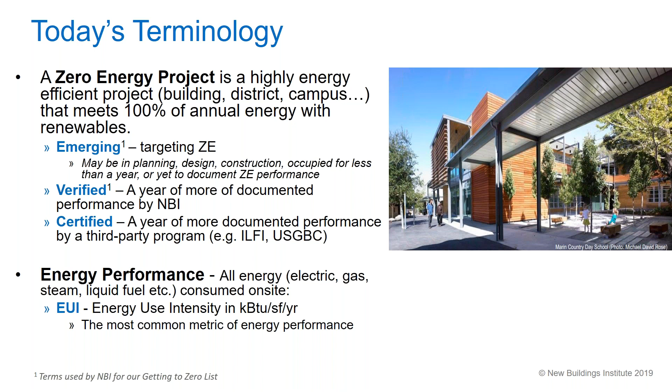We're also going to talk about energy performance. So we're going to use the phrase EUI, that's energy use intensity, site kBTU per square foot per year. That's a pretty typical metric. And the reason we focus on that is because efficiency, load reduction and efficiency are fundamental to getting to zero.

So we've been tracking these things for some time. We started back in 2012 with a status report on zero energy buildings. At that time, there were 60 buildings. We've put another report out every couple years. 2014, we had 160. 2016, we were up to 330. 2018, almost 500. 2019, 580. Now we are just shy of 700 buildings or projects on our list, which is exciting.

What you see there is the 2020 Getting to Zero Buildings list. That's actually a document that we're going to be releasing on Monday. And you can see this growth chart. It's really exciting to see the fast growth in zero energy buildings ramping up. My hope is that we work ourselves out of a job and it becomes impossible to track the number of zero energy buildings that are out there. So I'd love to see this number keep on climbing.

That's our national list. We also put out regionally specific watch lists, several for California over the years, Northwest. We've done sector-specific ones, like the Zero Energy Schools watch list, and a New York status report with lots of good stuff in there. If you're in New York, I highly recommend checking that one out.

And of course, last year's list. We're also just about to come out pretty soon here with a Midwest zero energy project list, which is exciting to be able to announce. So hopefully you'll see that soon.

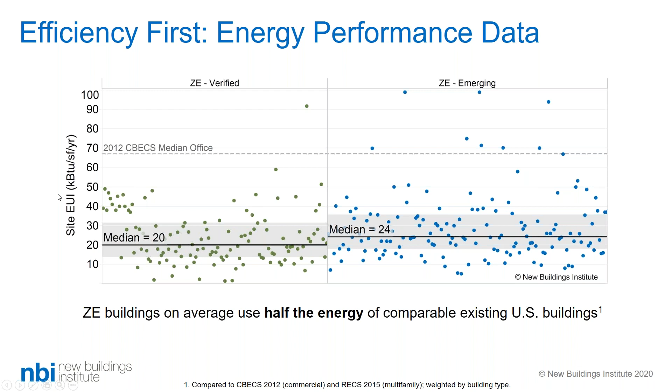And Alexi is going to tell us about the building sizes and trends there. When we first saw zero energy buildings come in, maybe 10 years or more ago, it was mostly small demonstration projects, maybe at colleges or nonprofit offices, things along those lines mostly. And they were pretty little, right — 5, 10, 20,000 square foot buildings. So for a while there, the first projects that got verified were quite small. It's encouraging that we are now seeing larger projects not only get built and be emerging, but come into that verified and certified category. So now we're seeing more big buildings, in the 100,000s of square feet range, actually make it into the verified range. That's a sign of exciting progress.

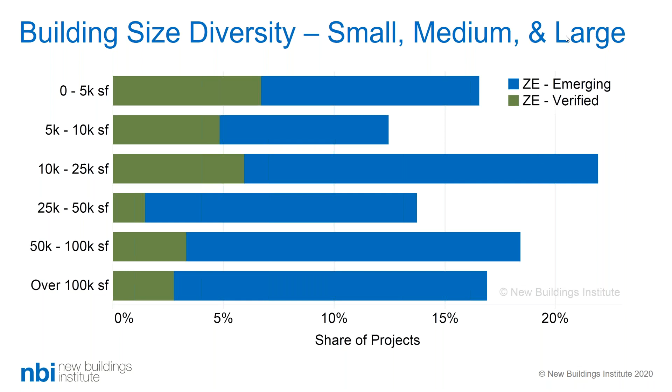So some growth that we've seen recently over the past several years is in the multifamily space. We don't have too many verified projects there yet because a lot of these projects are relatively new, but that's probably the largest growth that we've seen in the building type space.

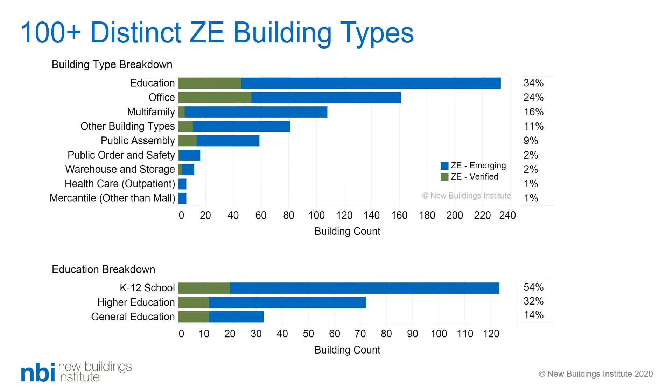Zero energy buildings from the get-go have been pretty evenly split generally between public and private. Who's in the lead can change a tiny bit here and there, but we've seen not only growth in the public sector, driven in large part by policy. Say the state of California has said all our new buildings are going to be zero energy, and we're going to retrofit our existing buildings to get there too. So that drives a lot of progress. When a big jurisdiction like that says we're doing this zero energy thing, cities and states around the country have made these kind of commitments, and Catherine's going to be talking a bit about that in a bit. But it's encouraging to note that we've also seen progress in the private sector.

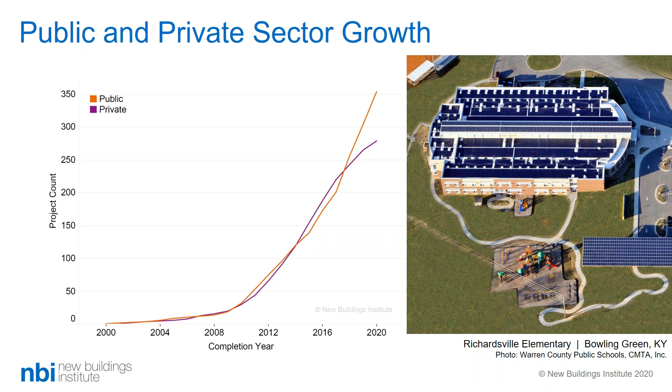So just to summarize the trends we've seen: zero energy buildings are found all across North America, both in the diversity of states—we have 46 states plus DC and 5 provinces—and in the diversity of climate zones. So we have all the way from San Diego to Quebec and all the way from Miami to Alaska.

We've seen exciting growth in scale, with some buildings and owners taking their zero energy approach not only at the building level, but moving it up to whole zero energy districts, or saying we're going to get our whole portfolio or campus up to zero. That's making some interesting changes too in how renewables come into the picture. Used to be they were all PV on the roof only, or maybe on some parking garages. But now when you're talking about getting an entire university campus or state buildings across the state of California to zero, now you're seeing some interesting combinations of maybe on-site and off-site renewables, or centralized renewables, or kind of new structures there.

And beyond just the physical scope of zero energy buildings, we're actually seeing a trend to increase the scope of the emissions and going beyond energy. So now we've got zero carbon certifications coming up, which Alexi will talk about in a bit. And we also see expanding to include things like maybe transportation, embodied carbon, refrigerants. So we're really seeing pushing the envelope beyond just zero energy operationally at the site.

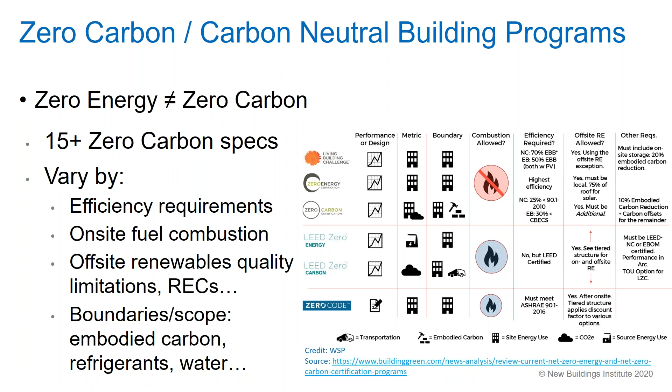NBI is working with several other leaders in the built environment through a group called Collective Impact, and we're trying to come to some agreements on this. At least, we want to agree on the basic foundations of this, so that even if we're not all on the same page, we're all reading out of the same book, and that will help achieve some consistency and hopefully advance the zero carbon buildings market in a cohesive way.

And one way to get to these zero energy and zero carbon buildings is through these technologies. Based on our database, we've pulled out some of the common technologies that we see in these buildings as a way to kind of show the market what people, as we will see in our case studies, what our leading designers are doing. I'll just quickly highlight a few of these. You'll have the slides so you can look at these in more detail.

But one big emerging piece is heat pumps for both space and water heating. There's a lot of development right now in heat pump water heaters to expand the scope of those and where they're viable. Ventilation, in some cases, we see a lot of natural ventilation where the climate is good enough to do that, particularly in California, we see that. And we see a lot of dedicated outdoor air systems to decouple the ventilation and the space load in these buildings.

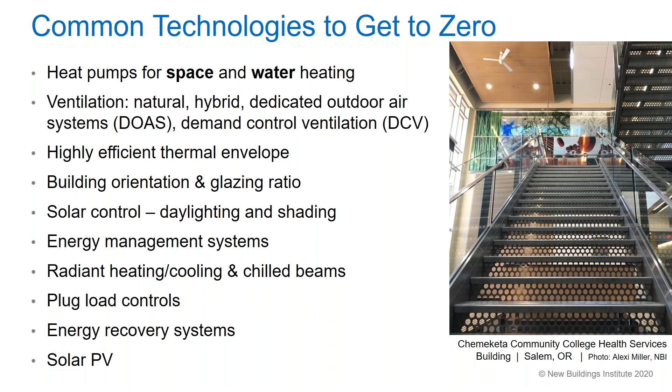Other big ones are radiant heating and cooling. That's very common in these zero energy buildings, but not common throughout the building stock. And then lastly, we have plug load controls, which is also not very common in the building stock, but we see this in almost every zero energy building to have things like automatic shutoffs for different outlets during unoccupied hours, for example.

So there are some interesting emerging technologies coming out that we're starting to see more in zero energy buildings. Heat pump water heaters are a foundational technology to decarbonizing buildings and are being used more and more in zero energy buildings. We're also seeing more buildings, especially multifamily, using central heat pump water heaters. And it's really exciting to see that there's good movement toward deployment of 120 volt heat pump water heaters, which is going to be a really important technology for retrofitting onto existing buildings, so that you don't have to deal with rewiring if you want to put an electric heat pump water heater where a gas water heater used to be.

We're also seeing some movements in equipment and in products toward lower global warming potential, that's GWP refrigerants. Current refrigerants, if they leak out, they tend to be pretty hard on the climate, they're potent greenhouse gases. But we're seeing some interesting new products coming out with lower GWP options and even natural refrigerants like CO2 or propane that are very, very low GWP. In California, in 2023, many HVAC products are going to be required to shift to lower GWP options, GWP less than 750, which you might call mid global warming potential. So that's coming up in California 2023, in Washington 2024. It's coming elsewhere in other timeframes. So that's an interesting shift we're seeing.

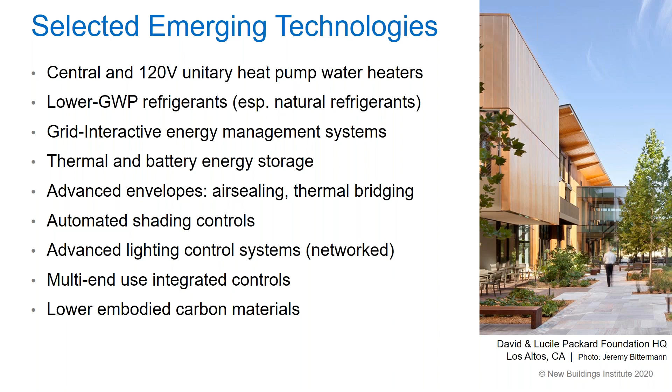So I just wanted to take a quick moment to do a technology spotlight. Heat pump water heaters are a critical technology that are being used in more and more zero energy buildings and in more non-zero energy buildings all over the country. They've been around for decades, well-proven technology, but they're really starting to take off now. The efficiencies tend to be maybe 2 to 4 times more efficient than a conventional either electric resistance or gas fired water heater. And that in turn delivers pretty substantial energy and lifetime cost savings over the course of the lifetime of the water heater, which comes of course with really significant reductions in terms of emissions on site if you're talking about gas, and power plant if you're talking about electric resistance heaters.

We've been running the Advanced Water Heating Initiative for a bit now, and it's really bearing fruit. Some of the work that's coming out of that, for example, the 120 volt heat pump water heater - we're really trying to accelerate the deployment of these technologies: central water heaters, 120 volt unitary, a couple different technology options to try to get as many of these out there as we can. There are lower GWP refrigerant options coming out right now, but that is not to say that we shouldn't be putting today's heat pump water heaters in buildings right now.

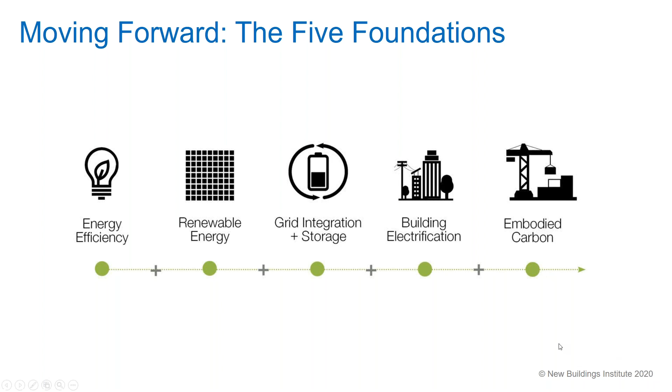We maintain a database that tracks all the zero energy buildings across North America. It's called the Getting to Zero Buildings Database. And Kevin's going to give you a little rundown on that tool.

Just to quickly bring this to everyone's attention, on our website you can see a live interactive buildings database. A lot of the data we showed is available online. Here's the link at the top of the slides, or you can search for it. Some things you can do with the database are filter by region. For example, here we filtered just to New York, so you can see what's in your neighborhood and what the leading projects are in your climate zone and region.

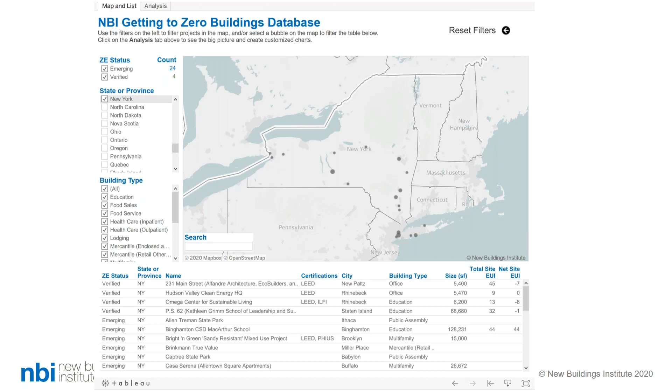Aside from the map, we also have a bit of analysis available with the same filtering capability using those checkboxes on the left side. A lot of what you see here should be familiar from what we've presented, so you can go in and tinker with it and see how things break down in your area as well.

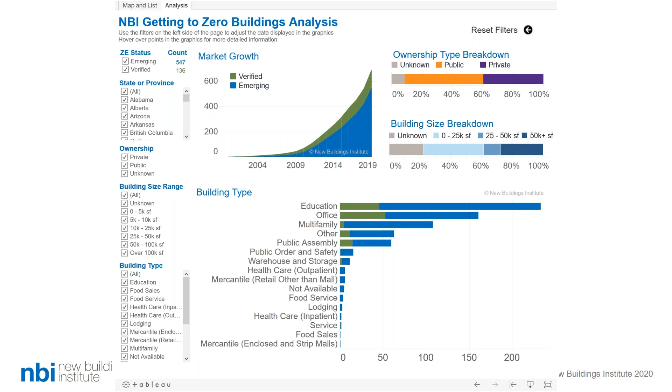So we encourage everyone to use this. We see these graphics and slides pretty often, so we just ask that you properly credit New Buildings Institute. Here's a citation to get you started.

Now that you've put a building out there, let's be sure we are tracking it. There's a project registry that we've put together. So if you poke around in the Getting to Zero database and you don't see your project in there, let's put it in there and give you the credit you deserve.

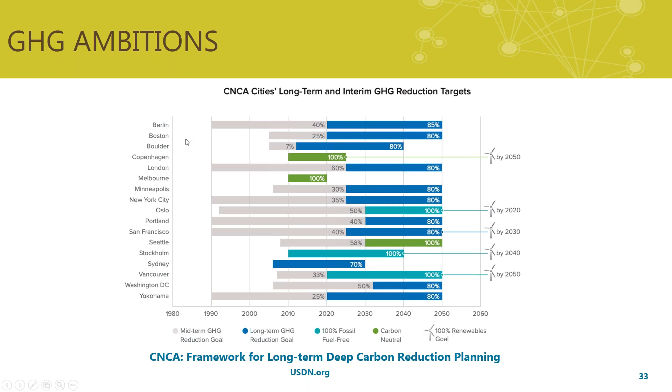What happens when local governments unpack their goals and try to understand how they can reach these targets is that buildings are a big part of that. When they examine what they have direct jurisdictional authority over, often energy efficiency and building development through zoning and codes are areas where cities and counties have more direct authority, as opposed to shared authority with the state or regional government. That's not to say this isn't hard work, and many cities are working in partnership with utilities who run energy efficiency programs as well.

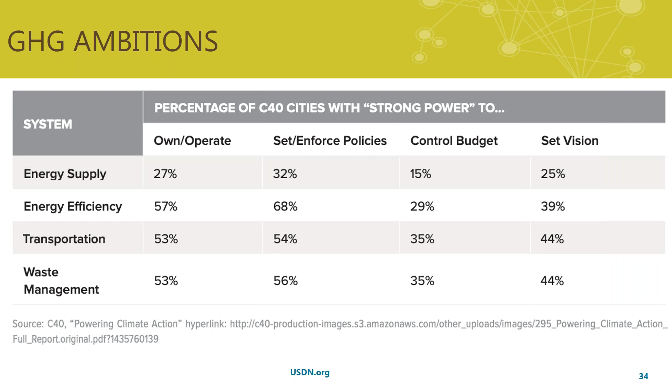It just does illustrate that there is sometimes a more straightforward path for cities to work on decarbonization in the built environment, and why the topic is of interest to cities and counties, and why it's always been a focus of our network. So given this, what's changed and what's emerging given this context?

As I mentioned, building energy was one of the first areas USDN has focused on since we started as a network. We've been helping local governments think about building policies for a long time. This began with early benchmarking and disclosure policies. While there are a lot of cities that have benchmarking policies now, there are still many more communities out there who are interested in standing up their own benchmarking policies. So that's still an active area of exploration.

As cities began examining their benchmarking data, those that had access to it realized that the emissions reductions and market transformation of the built environment they were seeing through benchmarking alone was just not going to cut it to reach some of those goals I showed before. So increasingly, a lot of cities and counties are looking to policies that go beyond transparency and disclosure, towards advancing specific actions and emission reductions in existing buildings and new construction.

I'll spend most of the remainder of my time talking about what we're starting to see. Many of the examples are drawn from our Zero Cities project, which we actually worked on with New Buildings Institute. This was a collaboration of 11 cities and community organizations working on transforming the built environment through decarbonization while also lifting up social equity. This project concludes this year, but many of the policy and programmatic efforts that emerged through this group of cities are also representative of some of the trends we're seeing more broadly.

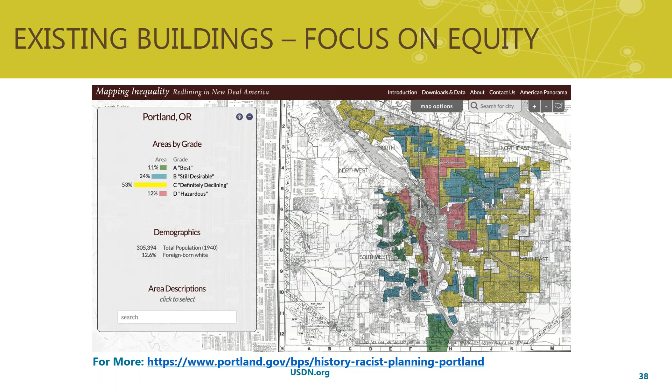Portland and their community partner, Verde, went through a series of dialogues, and the community lifted up that they were very concerned about energy burden and gentrification. The result of those dialogues was pushing for rental energy efficiency standards as a policy method of improving the city's worst buildings first. This was a shift in how they were thinking about their building policy, which had previously been focused around new construction and large commercial buildings. The community redirected some of those near-term efforts.

So many of our members in USDN are also trying to think about how to address energy burden and make health improvements in partnership with community. We're likely to see this trend continue, especially in light of the pandemic. So it is something that I wanted to lift up first.

Another piece of the existing buildings is really talking about ensuring performance. As I alluded to earlier, cities are really trying to push beyond benchmarking and transparency towards action, so they have more certainty that they will reach their emissions goal. So one method of doing this is a growing interest in building performance standards and other beyond-benchmarking policies.

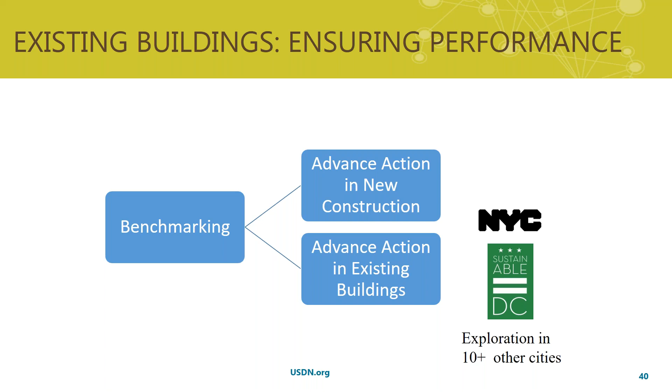There are more local governments than the three I named that are exploring performance standards. Besides the policies themselves, they're also thinking about what support mechanisms are necessary for these policies to succeed, like incentives, financing, and different types of support for private developers. They're also trying to think about how energy can be advanced alongside health and resilience through these standards.

Many cities were actively engaged in the 2021 IECC process to help ensure the code contained efficiency gains aligned with their goals. Since many national code changes end up as the basis for local stretch codes and local government adoption, it's becoming increasingly important to ensure the code contains strong efficiency gains in order for cities to be successful with their climate goals.

If you were following the codes process very closely like I was, and maybe you're just a nerd like I am, there was an electrification-ready provision in the proposed code. That's broadly in alignment with what we're seeing, which is broad interest across the country in learning more about electrification as a decarbonization strategy.

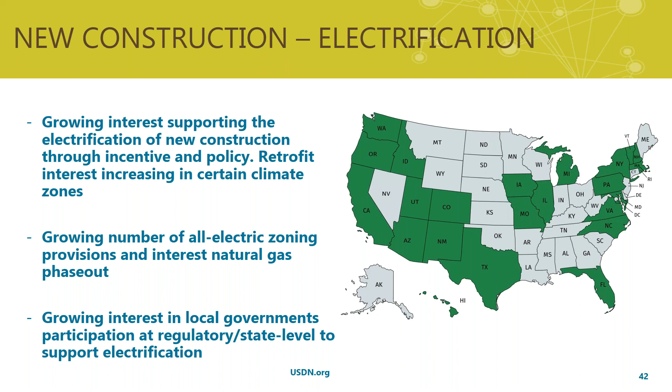We're aware of at least 11 state legislatures actively discussing this concept. So many communities are starting to look towards state regulatory agencies, as well as state level work, as where they might want to continue to engage in the future on electrification.

Hopefully this provides a helpful snapshot of how we are seeing some emerging policies at the local government level. There are obvious emerging complexities we're just beginning to understand and plan for. These include: how is the real estate market going to change in light of COVID and everyone working from home? How do we best integrate health and resilience into how we think about retrofits? And how does the ongoing national conversation about social equity fit into climate planning?

If you'd like to learn more about how cities are approaching work in the built environment, you can take a look at our Zero Cities project page. We just released a project reflections document to date, which might be helpful and provide more of a snapshot into how cities are working with community to advance high performance buildings across the country. So thanks, and I will turn it back over to NBI.

Thank you, Catherine, for that. Lots of info in that content. That was really interesting and encouraging. That's a good progress. Do we have questions popping in through the chat, or shall we proceed to the next set?

Well, we don't have any specific questions on Catherine's section, but Kevin really piqued the interest of our audience, and everybody wants to know who is the per capita leader on zero energy buildings. Kevin? Actually Vermont, and then Oregon is next. I think California comes in third or fourth. But yeah, Vermont is the winner there.

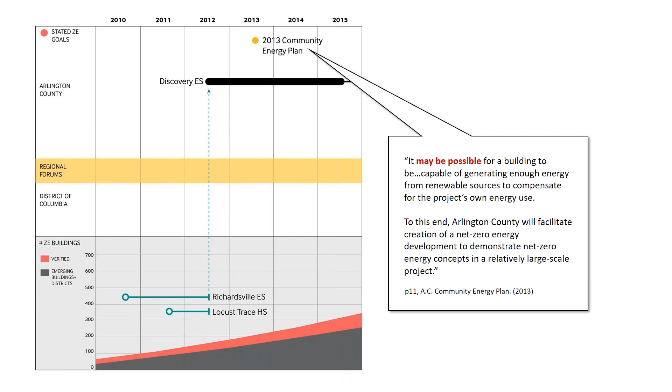As that project was ongoing, Arlington released its 2013 Community Energy Plan. It had this great little blurb in it, like, it may be possible to generate more energy from renewable sources than a building might use. So there was this tentative concept of it out there, but it was thought of as a demonstration, expensive thing to do.

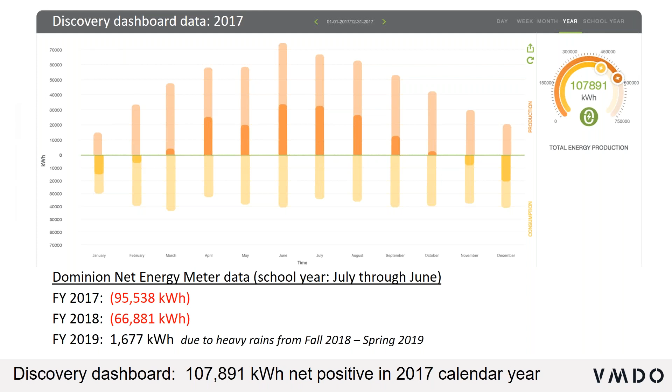Discovery opened in 2015 and used a lot of the technologies that were mentioned before: geothermal, HVAC, right sizing equipment, demand control ventilation, all state-of-the-shelf stuff that was integrated in a way that produced zero energy. Zero energy was a driving force in the design, so we had good data on it. It was verified zero energy pretty quickly afterward.

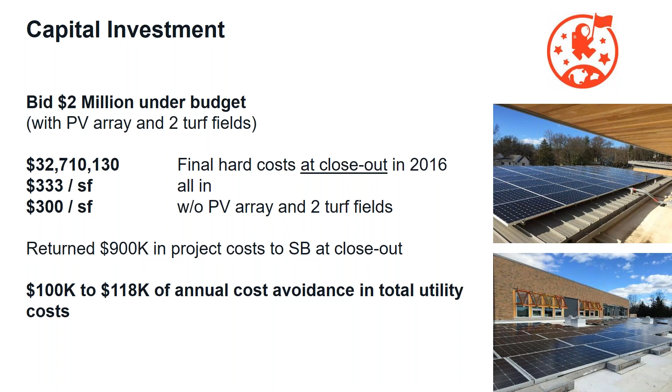For the capital investment, we came in $2 million under budget, even with the PV array. And the annual cost of ownership of Discovery is less than a tenth of other schools for Arlington. So it was a pretty successful model.

That success allowed us to, even before the project was open, secure Fleet Elementary School. That opened in 2019. This time the PV array was a PPA. It's on a tight, complicated site. It's 4 stories and uses a lot of the same technologies that Discovery did.

We took some lessons learned from Discovery and pulled them into Fleet. We changed the exterior envelope construction because Discovery was ICF construction, and that was a little bit challenging in this market, so this moved over to spray foam.

Shortly after we got through DDs in Fleet, our athletics and community design studio won the Lubber Run Community Center in Arlington. This was an important milestone for the firm, in that even though it was within the same municipality, they were different client groups, and the Lubber Run Parks and Rec was interested in exploring net zero, but it wasn't a requirement for the project, and they were a little bit nervous.

So we spent a lot of time educating the client, taking them to Discovery and touring it, having them talk with colleagues over in public schools to help get that sense of this is something achievable, and it was important, and it was verified, and it was easy to operate, and could come in at a normal budget and not to worry, so that by the time the team and the owner made the go, no go decision on net zero, everybody had already bought in.

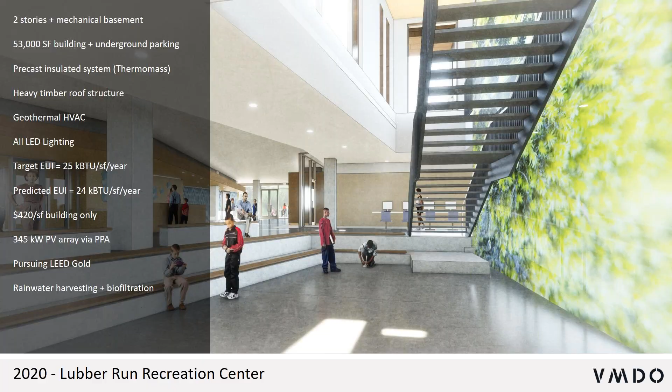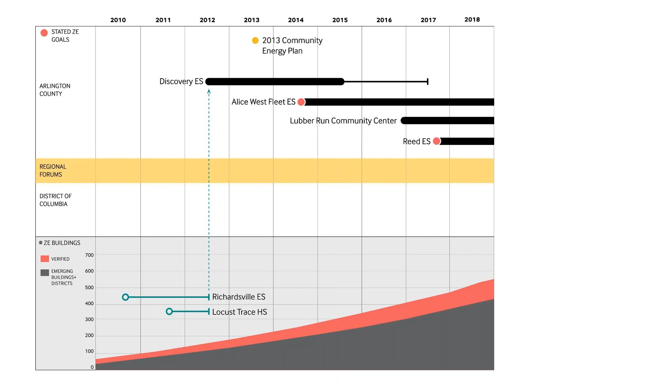From there, we won shortly after, as Lubber was exploring net zero and that client education was happening, Reed Elementary School, another net zero school for Arlington Public Schools. It is a renovation addition, 4 stories again, weird tight site again, opening in 2021, again using a lot of the same technologies and approaches.

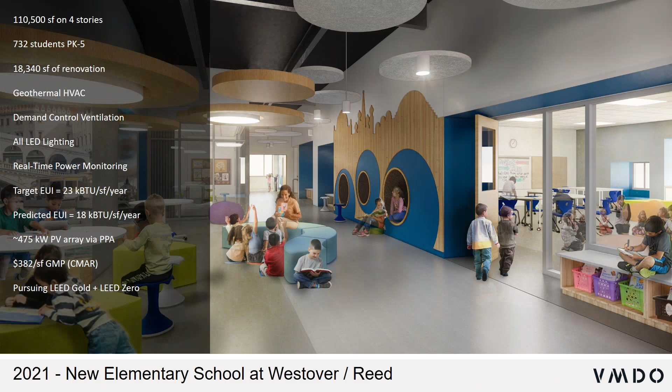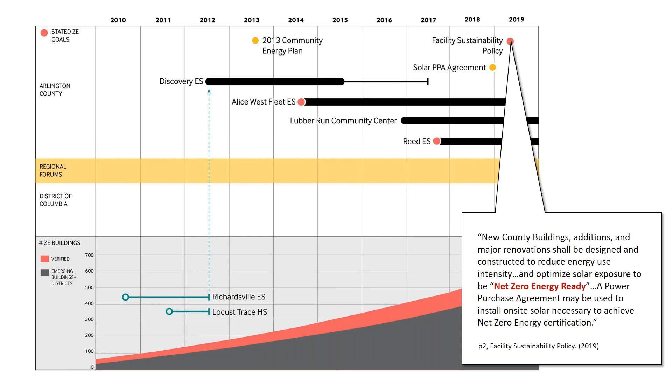So these are 4 projects that are going on. As we look at the larger context, Arlington Public Schools did a solar PPA agreement for 5 of its schools at the end of 2018. And in 2019, they released a facility sustainability policy, which states that all county buildings should be net zero energy ready. So they went from, in 2013, it might be possible, to requiring all public buildings to be zero energy ready within 6 years.

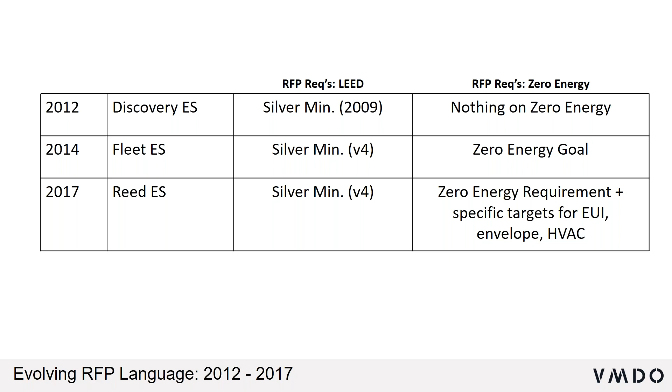If we look at the evolution of the RFP language, from 2012, Discovery's LEED silver minimum under LEED 2009, and nothing on zero energy, to 2017, silver minimum under V4 plus a zero energy requirement and all these specific targets for EUI, envelope, and HVAC. So that's a 5-year span for such a revolution.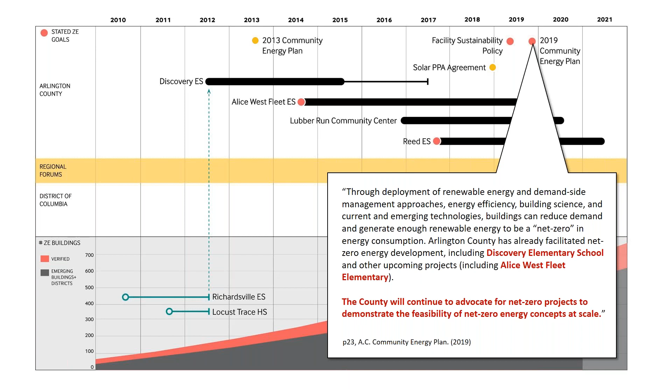Then in the 2019 Community Energy Plan, which updated the 2013 plan, it now cites Discovery and Fleet as evidence of net zero energy development and commits the county to demonstrating net zero concepts at scale. So it's quite a sea change in 6 years.

But what's most interesting to us is how this has become a regional dialogue. In 2016, the DOE Zero Energy Schools Accelerator launched at Discovery for everybody to share best practices around getting to zero energy in schools. And in 2019, the DMV Net Zero Building Coalition launched, again a Maryland, DC, Northern Virginia discussion around how to move more quickly and share best practices.

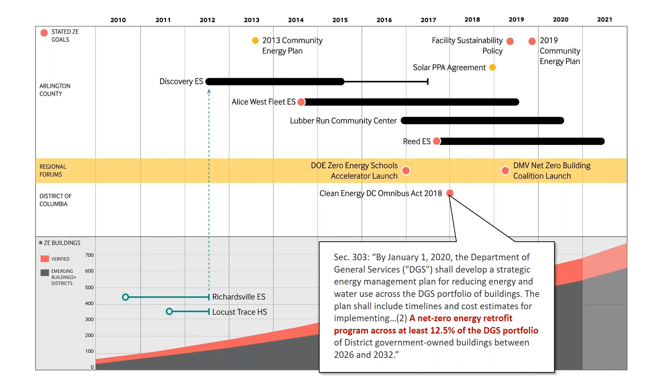The Omnibus Act has a requirement for a net zero energy retrofit program across 12.5% of the DGS portfolio. Clean Energy DC has district targets, but also in their action areas, 10% is constructing new net zero buildings. So you can see this net zero ethos permeating DC, and a lot of that points back to the successes within the area, including Arlington and its evolution over those 5 years.

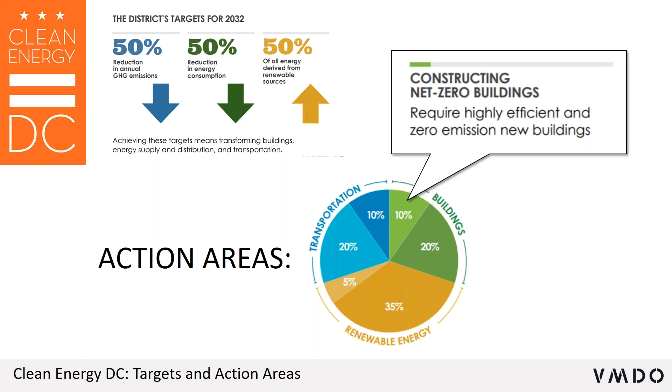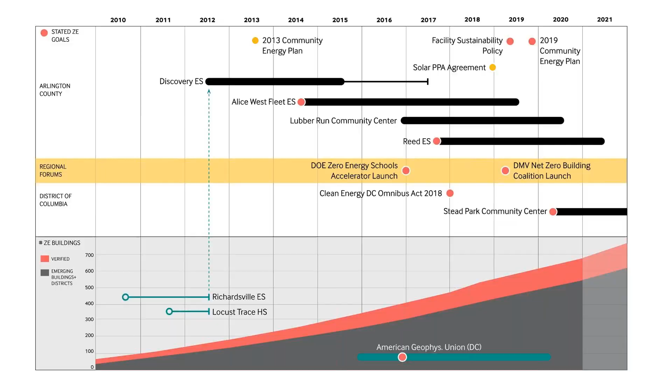So from what we witnessed in the market, the keys to transforming markets: the first would be developing a long-term relationship with key decision makers. That first leap of faith with Discovery Elementary happened because we had a very good relationship with our client at Arlington Public Schools. You have to have somebody willing to trust you to try new things.

The second is to demonstrate that zero energy ready can be done within current construction budgets. It doesn't have to be an add-on anymore. It can be accomplished with today's technology and today's budgets.

Third is leveraging successful projects and happy clients. If we hadn't been able to direct our Arlington clients to the successful projects in Kentucky, it wouldn't have happened. In addition, Lubber Run probably wouldn't have been as smooth a decision to go net zero if they hadn't been able to talk to colleagues over in public schools.

And then, educate. Every meeting, you're educating and reminding everybody that zero energy is the target. I talked to the project manager on Discovery, and he said he'd given 20 to 30 tours and talks and spoken to hundreds of people about the project. So it requires education all the time.

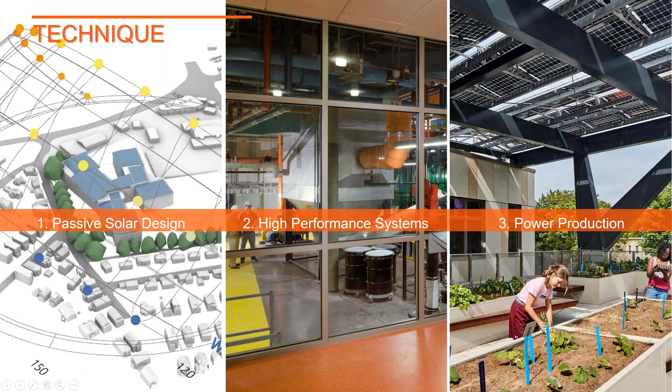In terms of the technique, there really are 3 clear steps. It's quite straightforward on the building scale. We have to start with passive strategies, lowering the need for mechanical systems. Next, we supplement with high performance, low carbon systems. And then, and only then, provide renewable energy for the needed heating, cooling, and power. Here we must do what we can on site, but also be part of advocating for a green grid, something we can both draw from and contribute to.

Not least, we have to also address the people and the building use. How people use buildings, what they do and how they do it, is not only the focus of the building design and configuration, but also the primary component of building performance. If nothing else, one positive from the current pandemic has been a focus on health and wellness, especially within buildings. More of this I'll touch on at the end of my presentation.

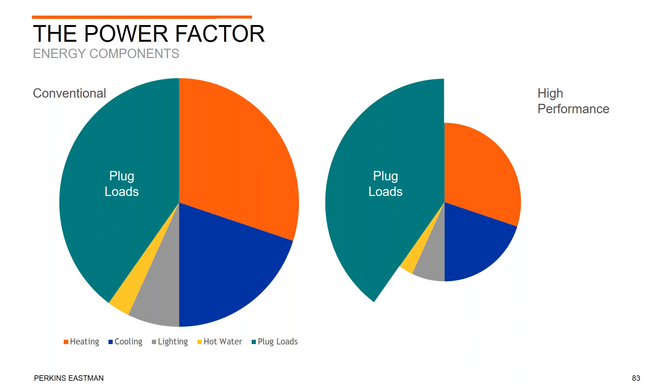The power factor. Prior to the pandemic, we were focusing a lot on plug loads. As we move from conventional energy consumption, depicted on the left, where you see the components of energy use, to high performance consumption depicted on the right, we know that the last component of energy to be improved is plug loads. We're working on ways to address plug loads in our buildings, so that's kind of the new frontier.

And again, the people. We need to focus not only on energy, but visual, thermal, and acoustic comfort, plus air quality. All of these aspects must be considered in making an optimal educational or work environment. And I'll share more on air quality in our case study.

So let's look at that. This is the project which is under design: the Tobin Montessori Vassal Lane project for the City of Cambridge, Mass. Now completing schematic design, it includes 4 school programs, preschool through grade 8, in about 300,000 gross square feet of program space, 400,000 if you count the parking, which is underneath. The project has a mandate for net zero emissions, and we're targeting net zero energy and reduced embodied carbon.

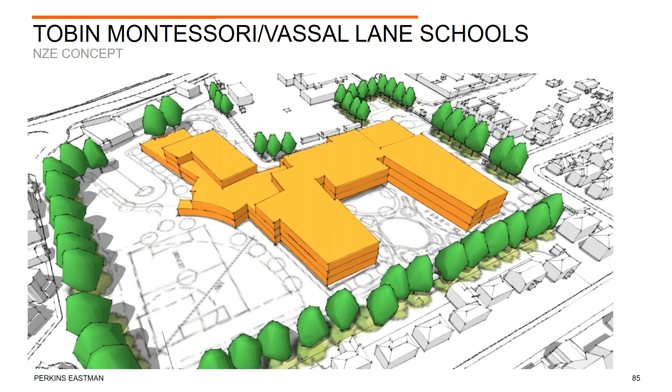This is a look at an initial study for a 2.5 to 3-story building with plenty of roof for power generation. We looked at an energy use intensity target and fixed on about 22 kiloBTUs per square foot per year, which is the lowest for the city and among very respected projects, including ones you've just seen that have targeted net zero energy. We'd love to go lower, but the building will have heavy use during the school day, evenings, weekends, and also over the summer for the preschool and community school and shared community facilities.

Paramount to good design is solar orientation. It's often noted that passive solar design is really important, but in our observation, it rarely is paid enough attention to. So this is a little study of our building, which is doggedly facing the sun, locating on an east-west axis as shown on the right, reaping the benefit of, conservatively, an 8% reduction in energy use just by the siting. The actual number might actually be twice that.

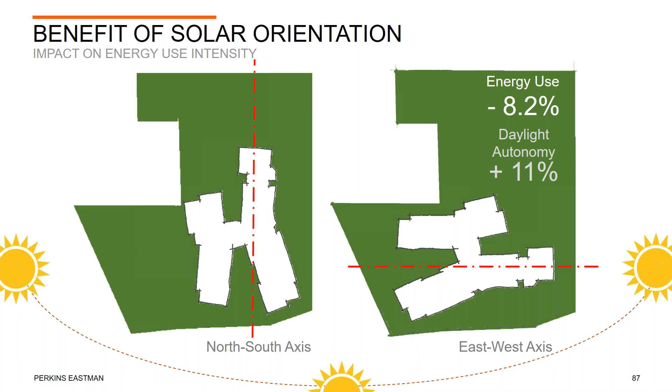Now, a major challenge has been the need to preserve and enhance as much community open space as possible on site. So while the solar orientation is terrific, the building is piled up to a 4-story building. And in our climate, with our solar access, solar panels make about 66 kBTU per square foot per year. With a target of 21 or 22, they can really only support a 3-story building with full coverage. So we're having to design our way around that.

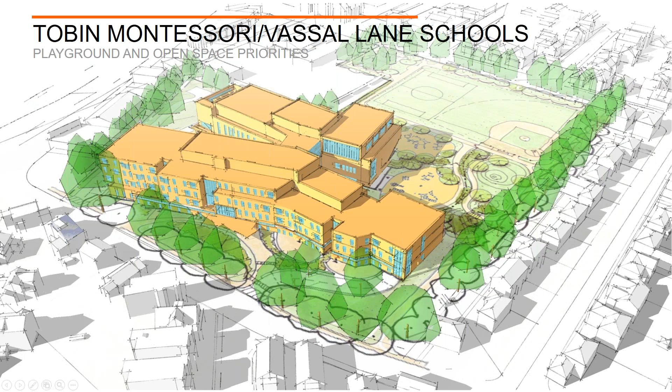One key may be, beyond the solar orientation, looking at connecting the building to the site and microclimate. Our climate in Boston is sort of like DC was 20 years ago - DC has shipped their climate up to us, thank you. And now, when we didn't used to have to, we pretty much need to air condition. But the building can be designed to minimize the amount of AC used. So here you see an image of the heart of the school designed with a permeable building skin that allows us to connect to the outside and reduce air conditioning loads.

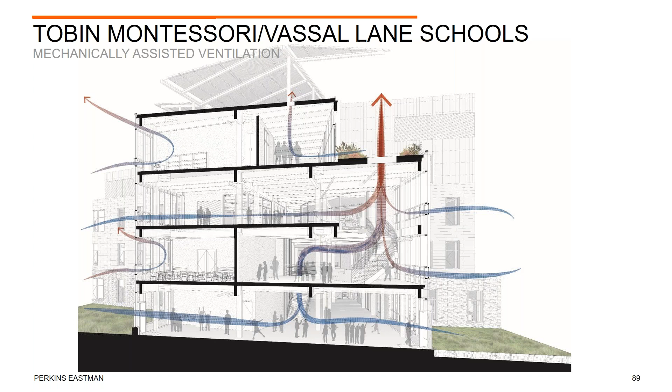The facade design is no longer just about gut feelings. It's about window wall ratios, high performance glazing, solar shading, and doing iterative daylight and energy modeling to optimize the facade, in addition to providing a variety of view windows as reflected here.

And PV, related to power generation, we must pile on the power generation, but also must finesse the details. The PV is developed in an integrated aesthetic and analytic approach.

We're developing a rooftop canopy to limit walkways, which can reduce the available area by 15%. And we're looking at this butterfly pattern that adds about 5% to the overall production compared to a flat array.

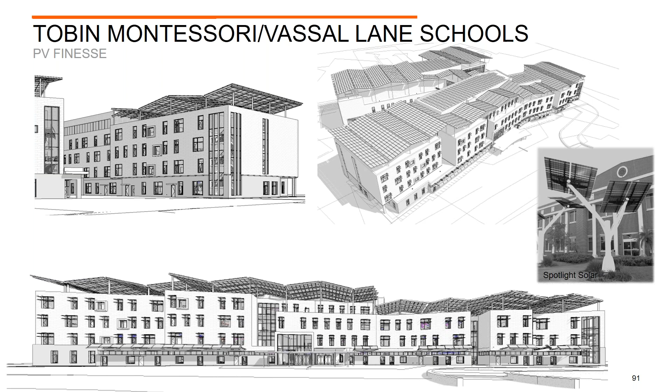One of the more interesting studies we're doing is related to ventilation strategies. The question has been, how much air must we deliver to make as safe and productive an environment as possible? No question, we'll have a dedicated outdoor air system with heat recovery and air filtration.

Pre-pandemic, we were looking at adding ventilation for increased student performance. We're contemplating improving on code by providing 3 air changes per hour, or bettering ASHRAE recommendations by 30%.

Along came the pandemic, and we're looking at more ventilation to safeguard our students. I'll be honest, when we learned that the Harvard School of Public Health Healthy Building Team suggested 4, 5, or even 6 air changes per hour, those of us thinking about energy conservation freaked out, thinking about what the impact might be for the energy regime, and also wondering just how big those ducts might be.

But we looked more carefully at the recommendation. The call for clean air increases the benefit of filtration and recirculation, and we've been evaluating a hybrid air source heat pump and ground source heat pump system that incorporates local MERV 13 filtration, and this can contribute to the clean air regimen. So here you can see that recirculation and filtration can add as much as 5 air changes per hour to the dedicated outdoor air supplied.

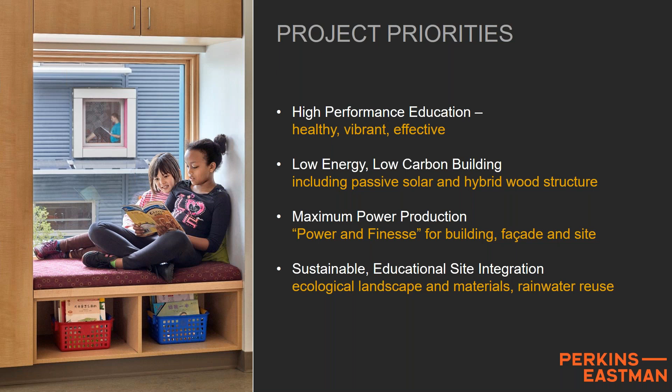So our project priorities range from high performance, low energy, and low carbon to maximizing power and interacting with the grid, and also interacting with landscape materials, reusing rainwater and the like. So a holistic approach in addition to a net zero approach.

So back over to NBI, or on to Darryl. Thank you, Dan. That was interesting. What a difference a pandemic makes, huh? In how much? Well, in everything. Ventilation, not least. Thank you for that perspective there.

I'd like to pass it over to Darryl Boyce to talk about the ASHRAE headquarters.

Thank you. I'm very pleased to be part of this workshop and talk about our real world experience and sort of applying sustainable development principles in the real world.

Our current headquarters, which we are still in, is in Atlanta, Georgia, 35,000 square feet. We actually upgraded that facility and added to it in 2008 to LEED Platinum. We were not in any particular rush to leave the building, but the Children's Healthcare of Atlanta really needed our site for their expanded facilities, so they purchased it, and we went looking for a replacement.

So we thought we could buy some land and build a building, have a building built for us, do a lease purchase, or buy an older building and make it good. We chose the latter, and we bought a 66,000 square foot building that had been built in the 70s, purchased in December of 2018.

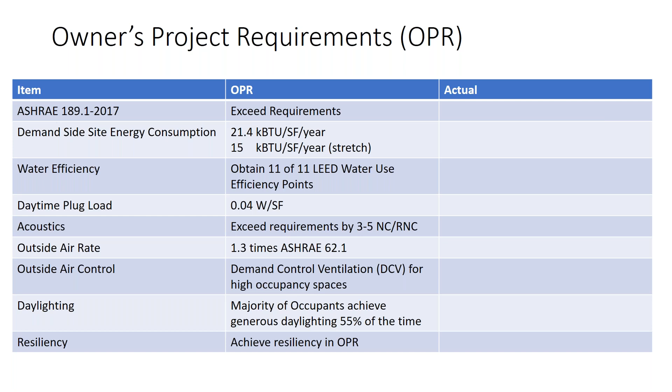Our current building had some issues with acoustics, so we wanted to really push the acoustics envelope by 3 to 5 NC/RNC versus our standard requirements. Ventilation rates 1.3 times ASHRAE 62, demand control, and daylighting for the major occupants 55% of the time.

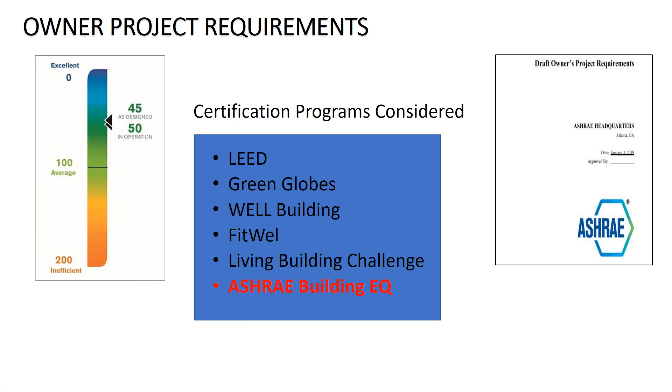We also analyzed some certification programs and felt that any money that could be spent on achieving certification is better spent in the building. We ended up relying on ASHRAE Building EQ as our primary evaluation program, and also LEED Existing Building was the next program once we got up and running. We're also planning to get a few of the petals in the Living Building Challenge.

The standards we must meet or exceed are shown on this slide, but the only thing I really want to talk about is that we wanted to exceed or meet our ASHRAE Advanced Design Guide for zero energy office buildings, because that's where we were headed.

We had a very aggressive schedule. In January of 2019, we hired a design team, and we need to be in by this coming October because we have to be out of the building that we sold to the hospital. So we're keeping on schedule right now, and we are on schedule to be in the building in October.

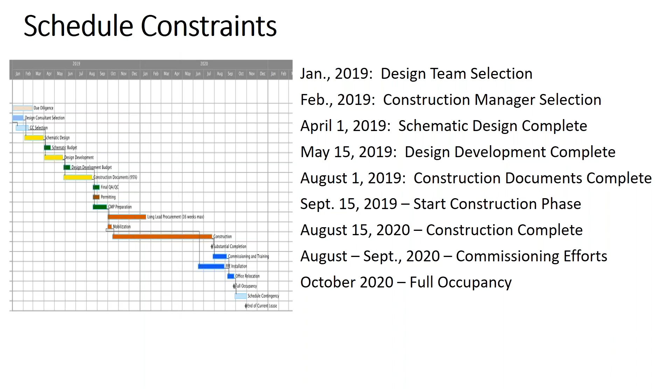Everything's good. Our construction budget is a little over $10 million, or $165 a square foot. We had donations, and photovoltaics are not included in that budget. The total project budget, including purchase of property and fit up, is $20 million. We believe we hired a good design team and got on with it.

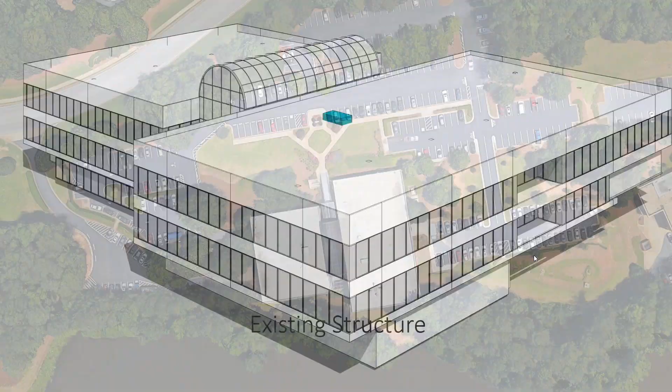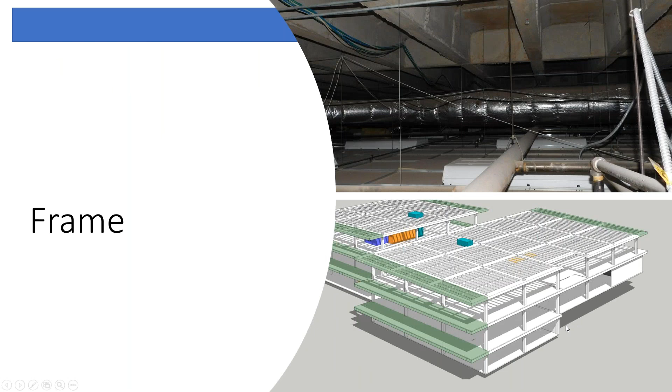So we went from a very small site, like 2 acres, to an 11 acre site. We've actually moved to a much more pleasing location. We have trees, a small lake, and plenty of parking for staff and visitors. The existing structure really was precast concrete panels and floor to ceiling window units, not very efficient. But the structure, when we analyzed the building, was the frame and the structure had good bones. So we felt this was a good move for us. The site was a great location.

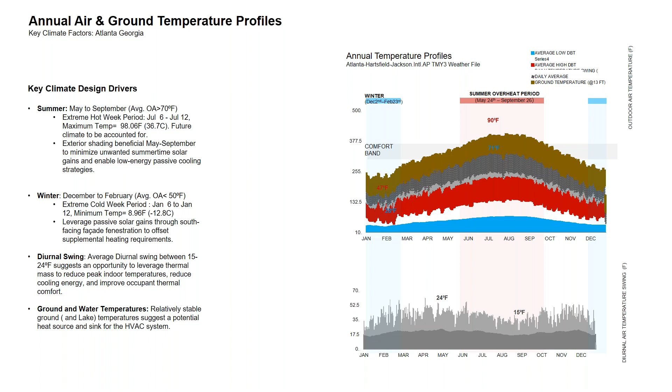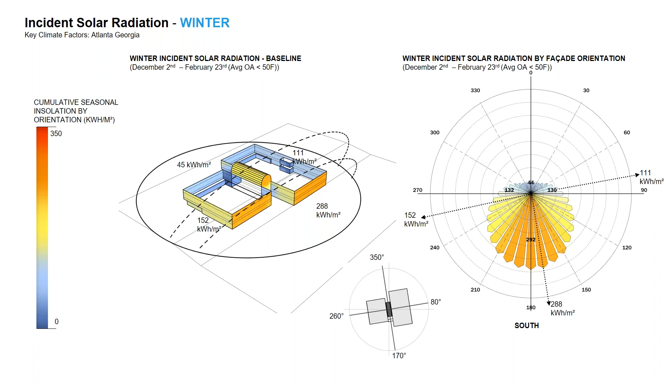We did analyze the climate factors so we could have a better understanding of whether we could use ground source energy and the amount of free cooling. We also analyzed, since the building was already there, the solar impact on the building from a daylighting point of view, photovoltaic potential, and energy use.

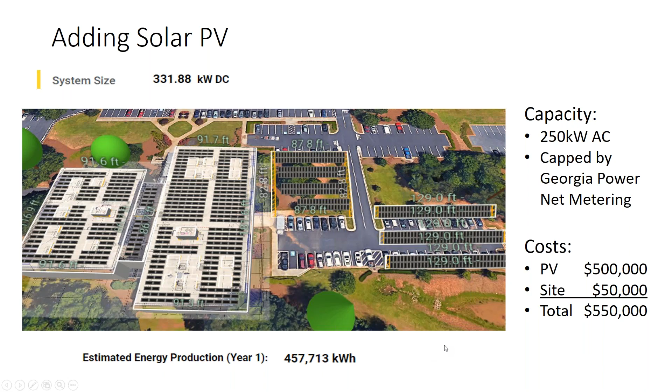We did actually come up with a plan to put a lot of photovoltaics on the site, a certain amount of it on the building, and then some on-grade photovoltaics. We were capped at 250 kilowatts AC, and total cost for that is $550,000. We believe that will meet our energy use requirements.

When we analyzed the temperature around the Atlanta, Georgia area, we found that 23 to 30% of the time we could use natural ventilation for cooling. So we are doing that.

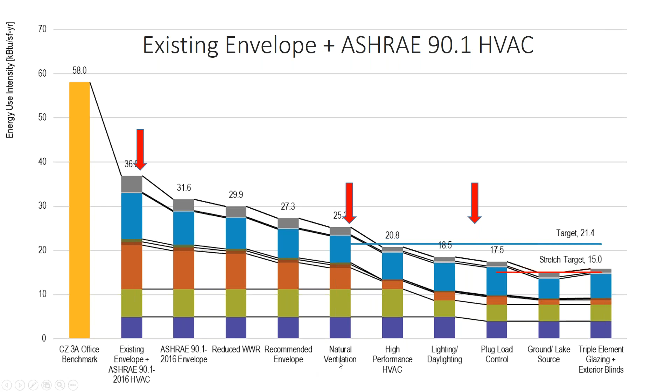We have an all-electric building, and we did analyze the use of energy in the various aspects of the building operation. We moved from the existing envelope using 90.1, to an upgraded envelope and recommended envelope, natural ventilation, high performance, and plug load control to drive our move to a building that could be net zero.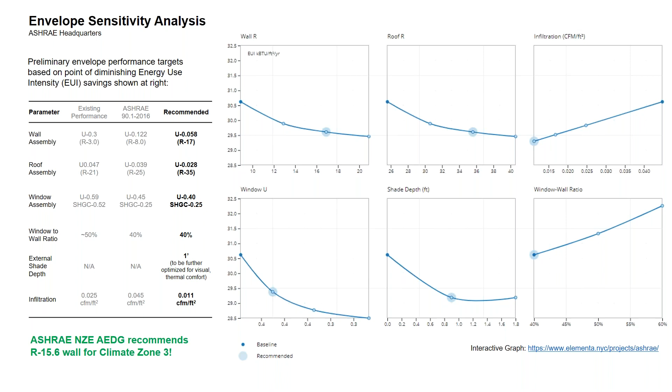It was very important that we work on window to wall ratios. We had a number of workshops where we zeroed in on how we were going to get there: wall assembly R17, roof R35, window value U.4, 40% window to wall, and then one foot shading on the exterior. The infiltration number was impossible to achieve, and I'll talk a little bit about that later.

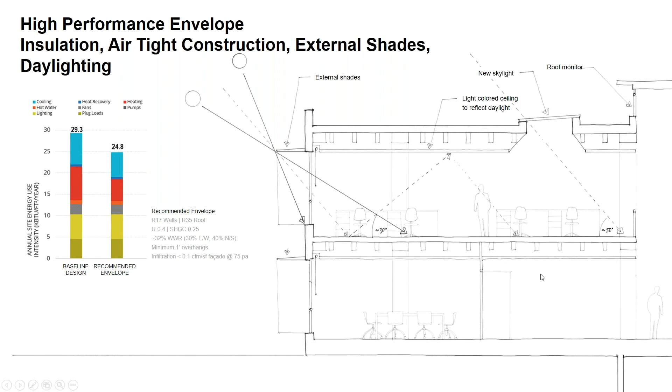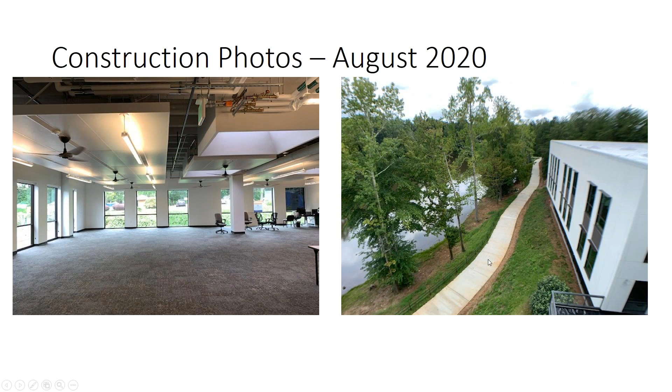Give you a sense of how we use daylighting and some skylights to make sure we have natural lighting wherever possible in the building. This gives you a sense of our pictures of where we are in August in terms of the building completion. While we were in construction, before we started, the city of Peachtree Corners put in a nice pathway around the river and the lake, which worked for us.

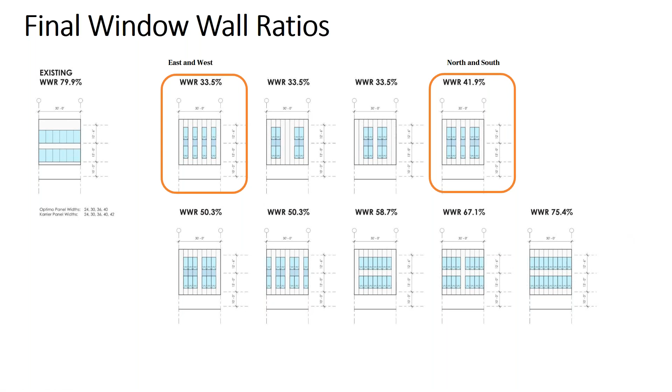We were able to achieve a window to wall ratio average of 40% - 33.5 on the east and west, and 41.9 on the north and south. The existing walls and windows had a fair bit of light, but only 35% daylighting. We then settled on short windows with 18 skylights for 57% daylighting on the upper levels.

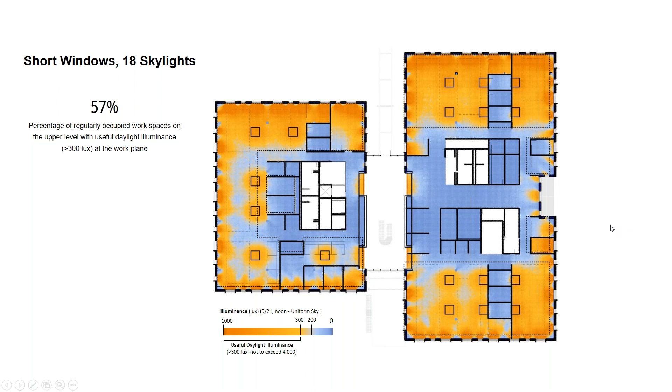Again, we had a way of hitting our net zero energy operations. So we had to demand more from the envelope, thermally and in tightness, demand more from the building occupants in terms of plug load and daylighting, utilize high efficiency systems to reduce energy demand, hydronic versus airside, and then DOAS as well, right size equipment, and provide flexible systems.

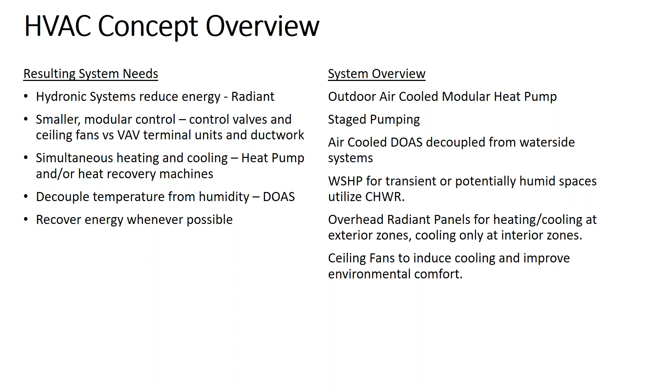So we ended up with hydronic systems to reduce energy, radiant panels, smaller modular control valves and ceiling fans versus VAV terminals, simultaneous heating and cooling with heat pumps, and decoupling temperature from humidity with the DOAS. Those were the primary principles.

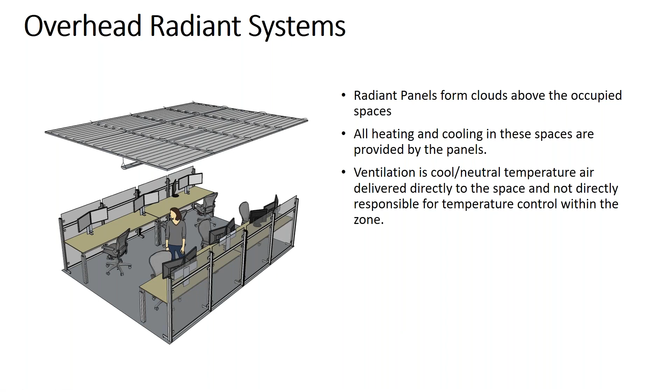Our radiant system was really done in clouds above occupied zones, and it's only for heating and cooling the zones, and the ventilation there. It's cool and neutral temperature air delivered directly to the space, not responsible for any of the temperature control.

Ceiling fans were an important part of this because we felt that if we didn't have ceiling fans, we could have unusual, uncomfortable situations. After installing the ceiling fans, if we had an air conditioning failure, we could run the building up to 80 degrees Fahrenheit and still get 89% comfort.

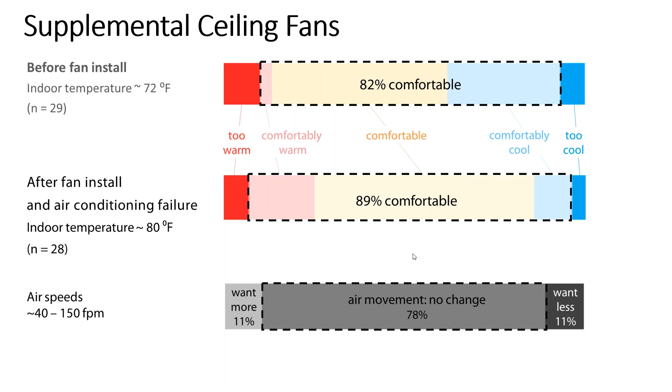We believe we're going to be around the 18.5 EUI target. The devil will be in the details when we actually get up and running. Here's a rendering of our interior lobby area in the refurbished building, and also our staff common room.

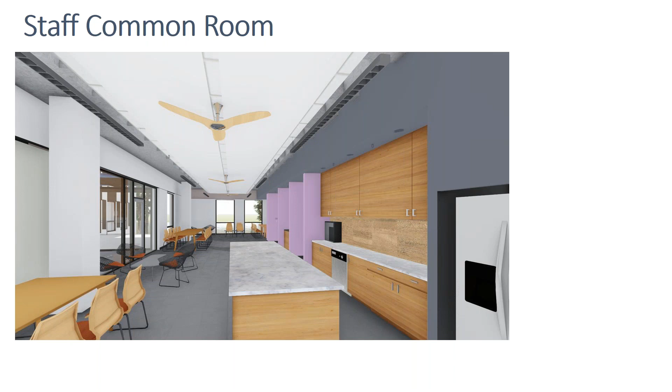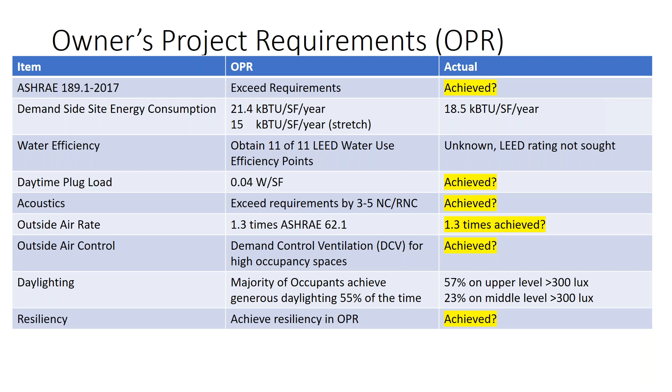And we learned a few lessons. First of all, understanding the local market - we decided that the radiant panel system would be good, but that wasn't usual in the local market in Atlanta, so we ended up paying a bit of a premium for that.

The condition assessment showed more plumbing system replacement, electrical and fire protection work than we anticipated. The scope of the envelope improvement needed to meet EUI was very extensive, and we really needed to use the knowledge of all the people involved in the design and construction.

We also found that we need to understand the utility's approach to on-site generation, and it limited the amount of generation we can have on the site. Strong engagement of the owner's representatives and implementation team at design development, and the importance of setting project goals in the OPR before the design team is selected, plus early involvement of subcontractors, would have greatly improved the implementation.

And that's it. Thank you.

Thank you, Darryl. Someday I look forward to visiting the ASHRAE headquarters. Yes, by all means - well, you can visit online when we open it. There'll be online tours and information on how it's operating. Fantastic. All right, so we do have some time left for Q&A, Connie.

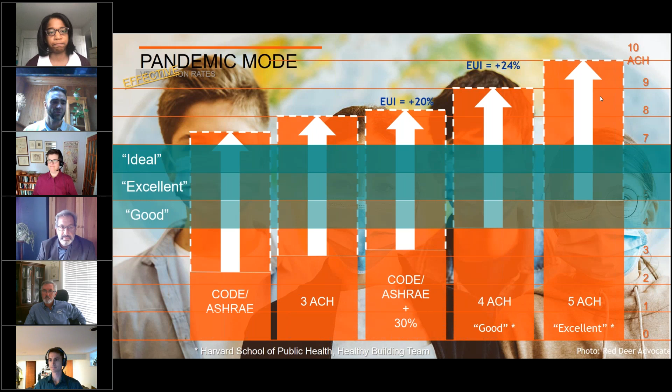Awesome, thank you. We had a lot of questions, probably about 6, on electrification in cold climates. Does anybody want to touch on that?

It's a pretty broad question, but there is a lot of electrification in cold climates, particularly on the East Coast. Vermont, through Efficiency Vermont, has had active programs. At the local level, you can check out the Heat Smart program run by Massachusetts Clean Energy Center, which has a lot of information about the feasibility of electrification in cold climates and has done some community level campaigns. So that would be my initial 30-second response. Others?